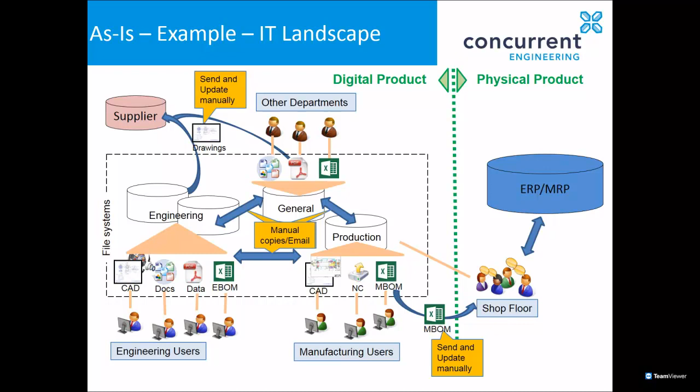Now, when that data needs to be shared around the business, which is pretty much inevitable, normally this is done by making manual copies, disk to disk, emailing copies of files around the business, or it may even come down to, if you're dealing with a supplier that doesn't have direct access to your network or the same systems as you, you're sending out paper copy. So we have disjoints in the system as well as these multiple silos of data sitting around.

So what is the goal of PDM? The ultimate goal of a PDM system is to give you a single point of reference for your digital product definition. So all of your defining data for your product in one

central point of truth. And once you have all of your data in this single system, then we can start to talk about PDM getting your revision management under control, managing the access of people within the business to the right data at the right time, managing the release of data. So as something is developed through its work in progress, goes to prototype, goes out to manufacture, and that release

procedure becomes more controllable, more repeatable with PDM. And ultimately, release of data almost inevitably leads to requirement to change. So your PDM system should be providing facilities for you to change, manage your design data as well. The fact that we're getting this level of control over our data means that we can actually record the history of our data as it changes over time. So we're getting improved traceability, who did what, to what, and when, and why, which ultimately simplifies audits if you're in a business that does require it.

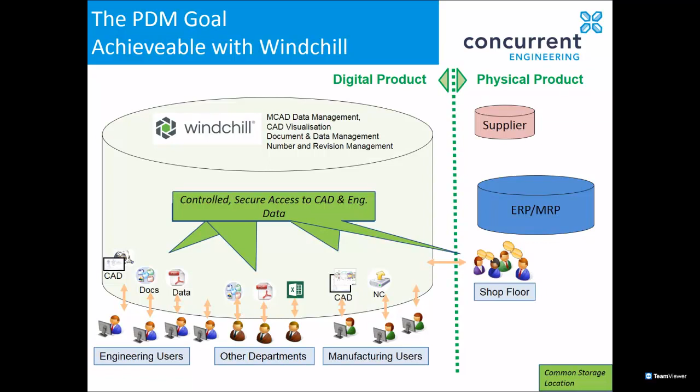So day one, Windchill gets all of your departments, business partners, working in one common storage location. Because we're getting all this documentation and design data pushed into one controlled storage location, we have the ability to apply secure access to any of our data based on business function, what state the file is in at the moment. If you've got something that's work in progress, you probably don't want the salespeople seeing it and mistakenly selling it before you've completed the design, or misinterpreting it, or cutting metal to it if they're on the shop floor. No, they get to see the released files.

Having that data in a controlled environment means the environment we're managing in, PDM, manages the revisions of those files. It does automated uprev on request of the appropriate user, and it maintains a history of revisions, so at some point we can compare revisions of documents, CAD designs, etc., to see what's changed, or indeed what did we ship on this date.

As I was saying, we have the ability in PDM to manage bills of material, information structures, which typically is the realm of ERP, MRP. But in nearly all businesses, the BOM exists before we're ready to go to manufacture. So our PDM system becomes the authoring tool for our BOMs.

These could be configured, edited, created manually, but typically businesses will use the intelligence of the CAD assembly structure. As the designer builds the CAD assembly, the PDM system knows the logic within the CAD file, be it SolidWorks, Creo, Autodesk, whatever, and can interpret that to give the first pass at the engineering BOM, which can subsequently be edited to put in items that might not be models, such as packing crate requirements or painting specifications. So we can start to manipulate the BOM right here in the PDM system.

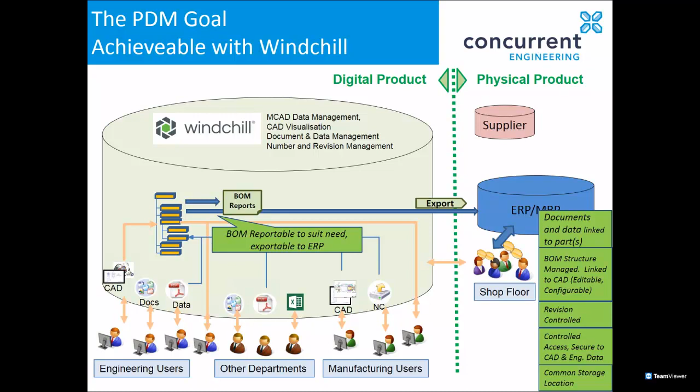In a world as it is at the moment, many businesses go outside of their own organization for assistance, be it collaborative design, supply, or manufacture. And you're typically having to send some of your documents, issue your IP to third parties. As we've mentioned earlier, once it's in an email, it's a copy, it's unmanaged, and it's very easy to lose track of.

So in the Windchill PDM system, we have the ability to identify recipients of data. You then create a package of drawings and documents, combinations thereof, and issue it to that supplier, collaborative design house, whatever, in the appropriate format for them, and it gets recorded in the system which files have gone to the supplier, at what time, what rev, etc.

So when you run a change in your PDM system and it impacts one of the files that have gone out to that supplier, we're able to flag the fact that this supplier needs a new copy, potentially because they've got out-of-date data.

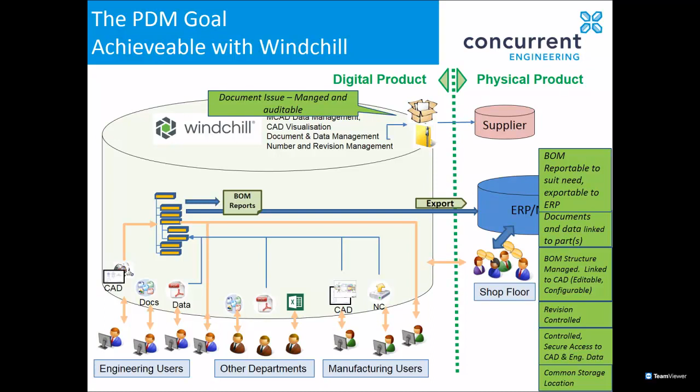Overlying all of this management of data, we have a set of configuration capabilities within our Windchill PDM system. So we have a built-in workflow engine. The automated review, release, change, and problem capture of our data and files managed within PDM can be controlled via workflows that are there out of the box, but you can right-size them, adapt them to match your business working practice.

Typically those workflows are manipulating the managed files, which will have a life cycle. So the system understands that your data matures over time. It will start as work in progress, it goes through a review and prototype phase, and then it gets issued for manufacture. Then you might up-rev that to do a mod, and you might have to go through a release process after a change, etc. So it understands the logic of this, and it's configurable to right-size it to your business.

The other powerful tools are in there, which we'll come on to slightly later—I know, the visualization and markup.

Because Windchill PDM understands the CAD format, and the other factor is CAD applications are too expensive to give to everyone in the business. If you want to give people visibility of your CAD designs, your drawings, the 3D models, then you've got to think of a way of doing it, and Windchill PDM provides this publishing capability.

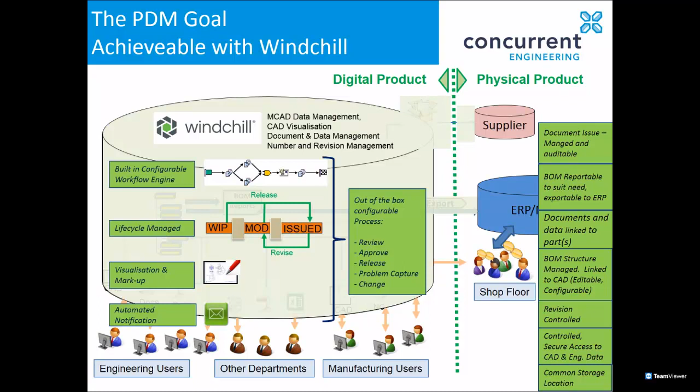The system comes with a whole bunch of standard processes which you can pick up and use as is, or adapt to your own requirements, or indeed completely replace.

So let's have a think about that. We've been talking about Windchill, and probably none of you have seen this before, so we'll have a brief demo in the short time we've got about the Windchill PDM system and what it looks like.

This could be the same interface whether you happen to be working in SolidWorks, CATIA, NX, or one of the electrical applications. So it's a consistent interface across the business.

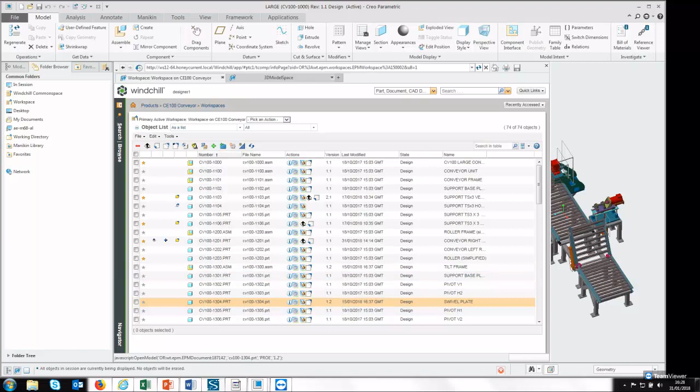So instantly, when I want to modify a file, the system knows I have to notify the Windchill system that I'm going to do so. So right here, interacting in the CAD system now, I can say, okay, I'm going to put a checkout flag on this now. I'm going to take ownership of it to mod.

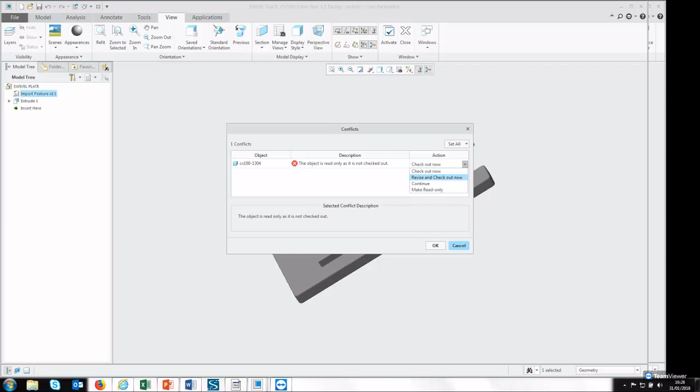Or no, this is a stage where, yeah, I could actually create the next revision now. So it will create, upgrade it from A to B, and I'll start working on B at work in progress, ready to push through the release process to go out. But I'm not going to get into a CAD demonstration at the moment, gentlemen.

So that's the Windchill interface inside CAD, and I could equally well go and look at the server content as opposed to my own data and say, okay, these are the products I have access to work on.

So I can go and get data from the server if I wish, but no. So if I now pop into the other working environment that most people will be using, which is Office. We know there are other applications, and Windchill will manage anything that's a file, but Office is the most common one. So I'm in Word, and I have my ribbons across the top here, and because I'm working with Windchill in my environment, I have a Windchill tab.

So right here, I have the tools that I am likely to want to use on a daily basis with my documents, technical specs, whatever they might be. So I can do a new rev, I can check it out, check it in, etc. But I've got nothing on screen right now.

So what I do is I want to actually go and open an existing document to work with. I can go and open and browse, or typically I'll just say, okay, I happen to know something about the design file I want to work on. So I happen to know I want to work on a user guide, and I know it's got guide in it somewhere.

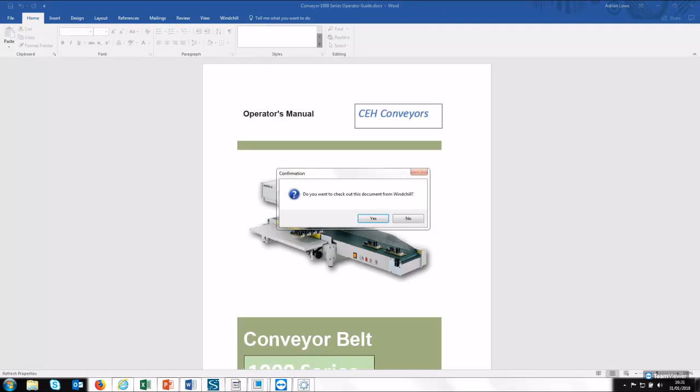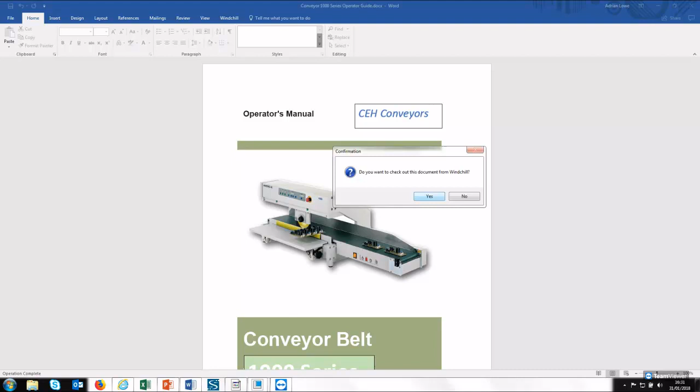And again, just like in the CAD system, the system knows that I potentially want to modify this because I've opened it. So do I want to check it out and take unique ownership for me to modify while everyone else just reads it? Yeah, sure. So right in here, I can start making some alterations to my document.

I'm not going to be too intelligent about this right now. And on my Windchill menus, I can now say, okay, I want to check that back into the server. Or I know I want to promote it, so I want to start a release process to get my new version of the document approved for issue. So it's giving me the right Windchill PDM tools in the interface where I work for my day-to-day tasks.

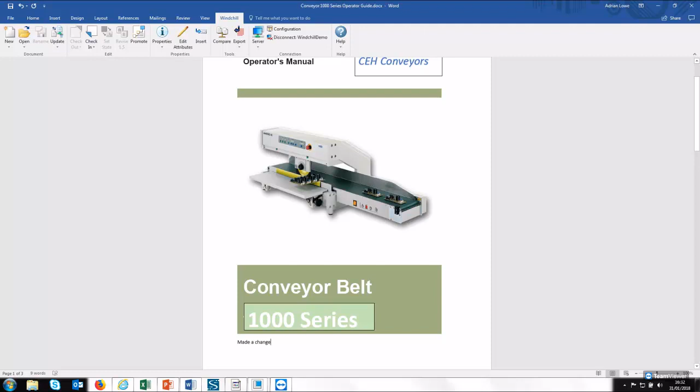Now, it may be some users want to do more powerful things with the system other than what's just available in their local interface. Or it may be people just want to go and interrogate the data and search for it. Now, the main interface into Windchill is via a web browser, because Windchill is ultimately a web server.

So just click on my saved link up here. I identify myself - again, generic user for this demonstration system - and give it a password. The reason I identify myself, I tell them, if I could spell, I'd be dangerous.

So I identify myself, so the system knows what access rights I have, what roles I have to perform in the system against whichever designs or projects I might be working on. And it does that by getting me to log in. So here I am logged in as Designer 1.

And by default, I get taken to my home page. Now, every user has a home page that has information that's pertinent to them at this point in time. So right at the top here, I have a task list. Now, these are activities issued to me via a running workflow that says I have to be involved in a business process for certain things.

Now, I've got these on my home page. They will also have been emailed to me with a hyperlink in my Outlook mail tool or whatever I might be using, so I can click and come back into Windchill straight to the activity. But the tasks I've got here, it's an approved promotion request. So basically, it looks like one of my peers has been doing some modeling on a part and wants me to approve it, check it for him before it gets pushed through for full approval, full review and release.

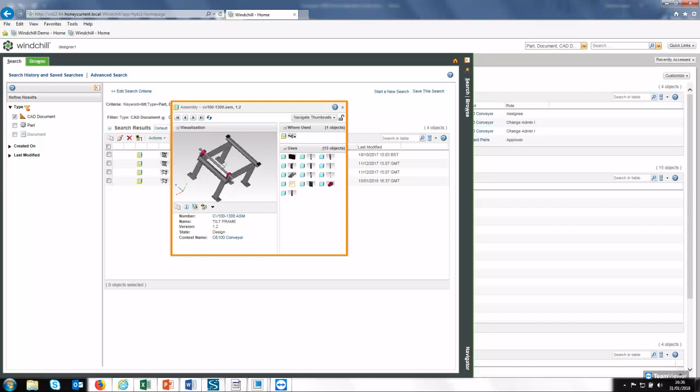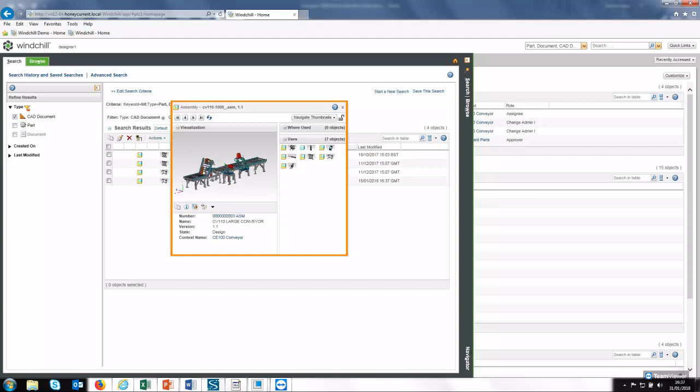And I get these lightweight viewables here, so I get thumbnails, which I can look at — sorry, my PC catches up — to see if it's what I think I'm supposed to be looking at. It also shows on the side here that this sub-assembly comprises these components, and oh, that component is actually used on two sub-assemblies. So I can very quickly get a very detailed picture in my mind of what I'm looking at right here.

Let's go back to looking at my parts, because the other power we mentioned is managing BOMs in Windchill. So if I go and look at my sub-assembly here, I can ask the system to build me a structure report, or a bill of materials if you want, for this tilt frame. So I've got a bunch of components here — it's got the intelligence to round them up.

I've got various other reports that I could run here, but I can get quite clever with the data that's stored against this, which again is all rightsizable through configuration to your business.

But now, the real power of having the bill of materials inside our PDM system alongside all our data is that most businesses work based on part numbers. So any activity that wants to be performed is typically performed against a part number or description of a part. So if I can find the part in Windchill PDM, I can come in and say, okay, show all documents, etc., and show all. Right here, I can see for my assembly, I've got CAD components defining each of the parts, but at the top level I've got my assembly, CAD assembly defining it, but I actually have a bunch of documentation that references back to this part as well.

And I can go and get data about them right here.

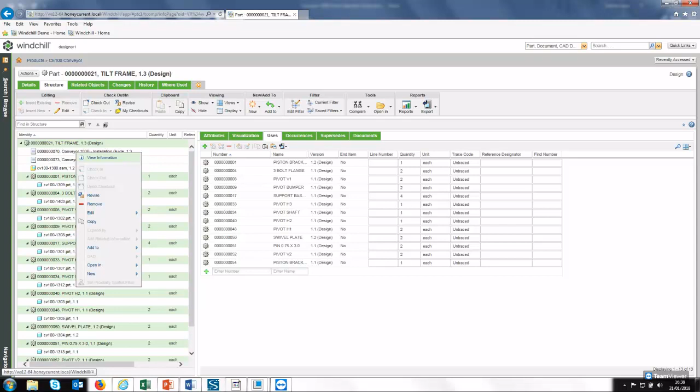But also, we mentioned the lightweight thumbnails here, which are all well and nice, but no — the real power comes in that I can actually, assuming I can prove who I am in this instance, because our security is set fairly high since it gets outside the business firewall.

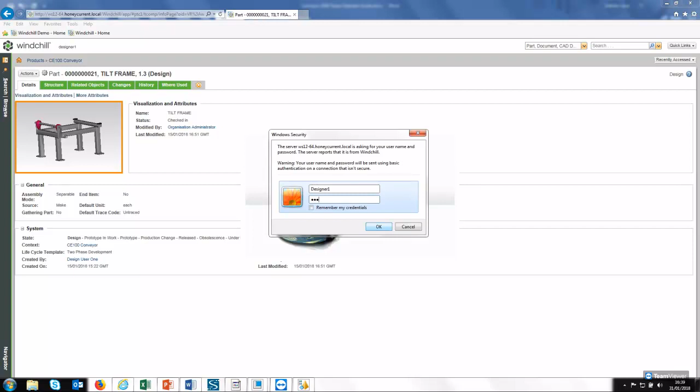And we don't want to lose our IP. It will load in our CreoView client viewer, where again it looks pretty much the same view to start with, but it actually has more detail, to the point where now, instead of just spinning it around, if I make this available to my technical illustrators, for instance, they can actually start to pick this data up and manipulate it.

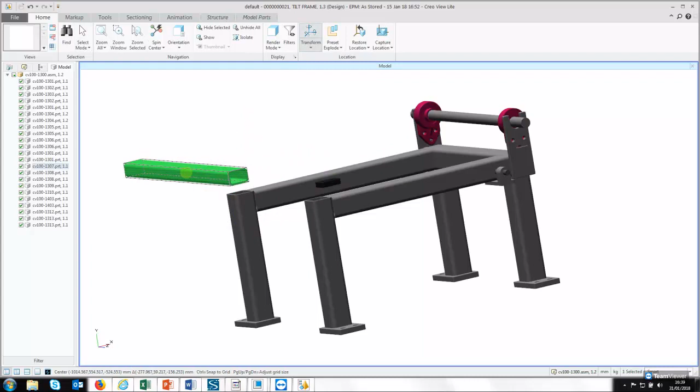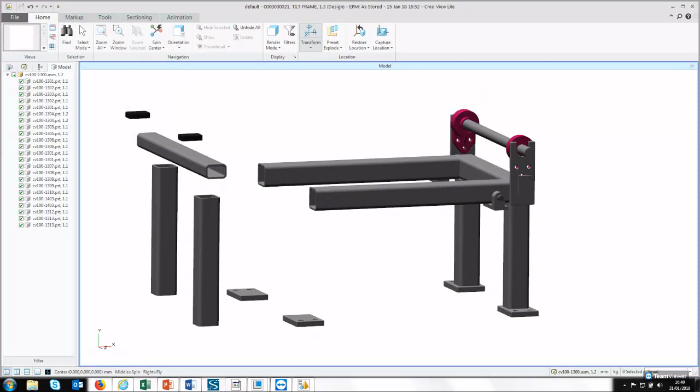So if my design engineers are spending hours every week preparing exploded views for my technical illustrators, then suddenly the guys can go off and prepare these images themselves. And they get stored straight back as annotation sets into the Windchill system beside the original data. So again, they're finding their illustrations via the part number. Let's just put those back where they were.

And you can do other powerful things. So if I'm investigating some data in here, it's okay, what's happening behind this component? So I can just say, okay, well, let's hide that. So what's really happening behind that component? So if this was an electrical assembly with an enclosure around a bunch of boards and wiring, I could just hide the enclosure and see what's inside.

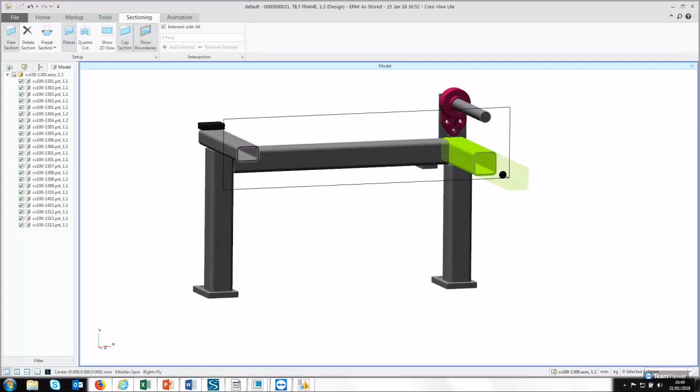The other tools I have access to in here, you can start doing sectioning. So there's a section, and what does my design look like as I pan backwards and forwards through it. So again, it brings a lot of power for untrained users to identify what's happening with the components, the assemblies that they're working with.

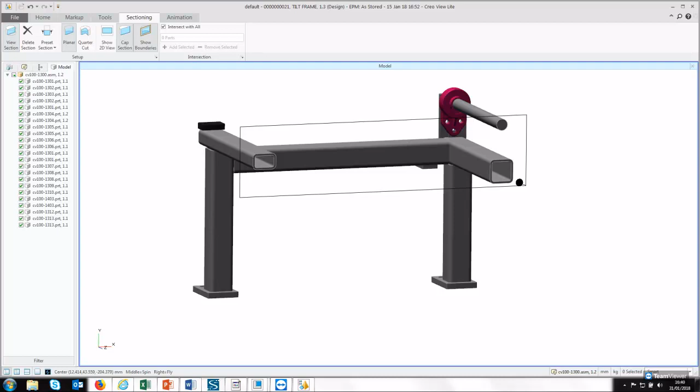Also in here you can start doing things like if we're running an approval and review workflow to get something released or approved, drawings, they can start bringing up drawings and 3D models in here and annotating them, taking dimensions off of them, marking them up, and again saving them back into the system.

So very, very briefly, hopefully we've shown you just how powerful getting all your data into Windchill PDM is, how much benefit it brings to the rest of the business, opening up the data to them. So let's just drop back into our presentation here.

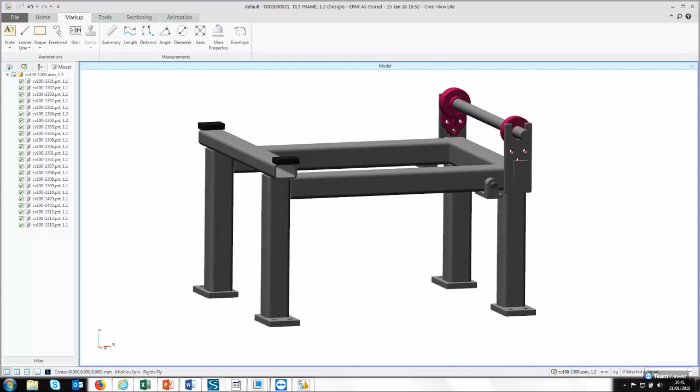So we've talked about what ideally our PDM system should be doing, what it could look like with it being Windchill. So what would be the positive outcomes for us? There's not one hard and fast positive outcome. It really depends on what process you're trying to improve in the business, what you're trying to achieve with your business initiatives, etc.

So there are many, many metrics that we can call on, and we have libraries of them sat in-house, whereby, based on many surveys of clients who have implemented PDM, both in our own customer base and in that of our supplier and other suppliers, people have done just as we've talked of, identifying the way they work now and the way they want to improve, and they can measure those improvements.

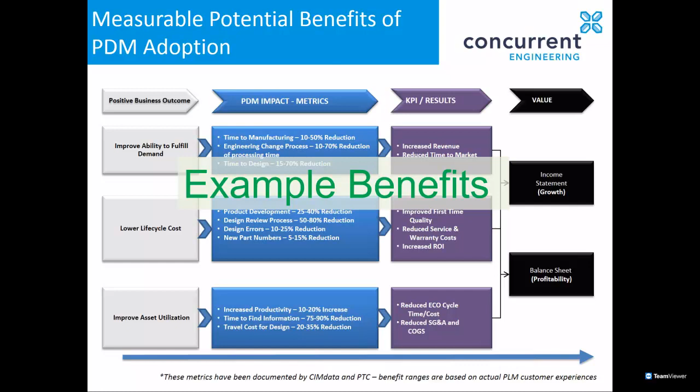So what would be the next steps? Because hopefully now you're seeing that PDM is a worthwhile route to investigate. It can bring benefit to your business. It can make life less painful.